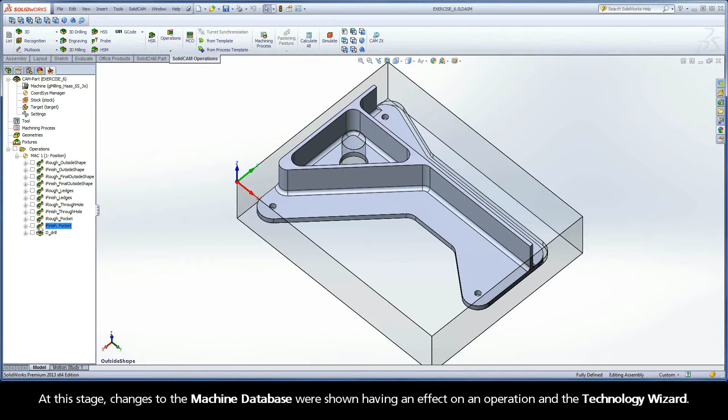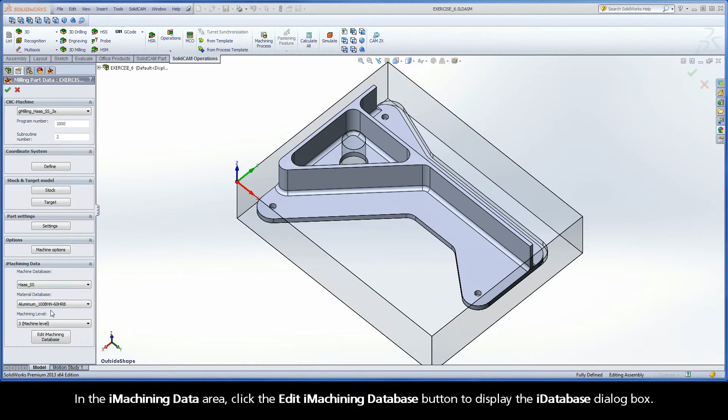Next, the focus will be on the material database and the steps necessary to either make changes to the current material definition or select a different material. To make changes to the current material definition, double-click the CAM part header to display the Milling Part Data dialog box. In the iMachining data area, click the Edit iMachining Database button to display the iDatabase dialog box.

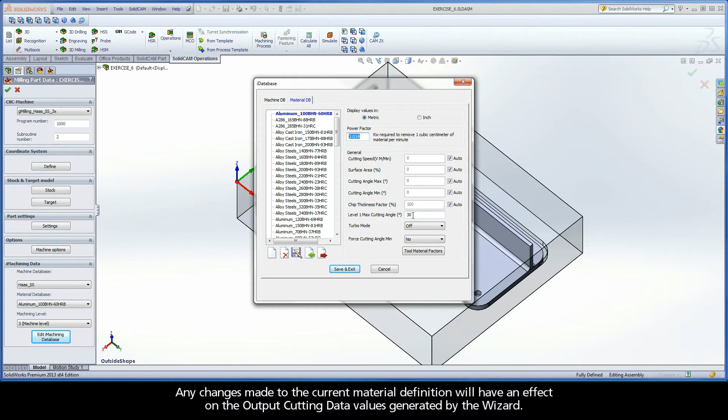The Material DB page of the iDatabase dialog box enables you to edit the parameters of existing material files saved on the system. Any changes made to the current material definition will have an effect on the output cutting data values generated by the wizard. Remember, the wizard is an algorithm for producing on-the-fly cutting conditions, and the wizard uses the work material parameters for calculating the optimal spin and feed rates, step-over ranges, etc. Click Save and Exit to close the iDatabase dialog box.

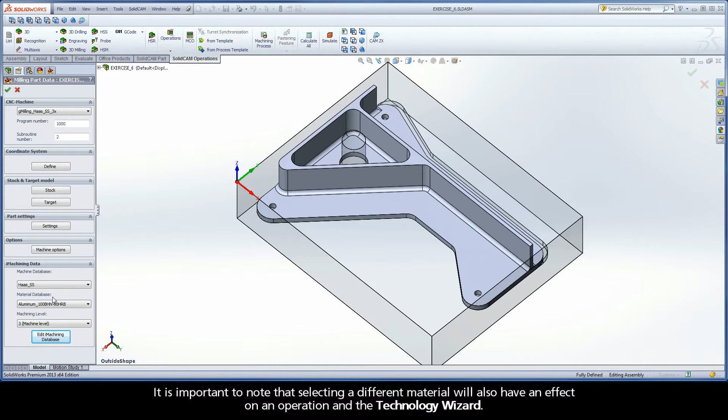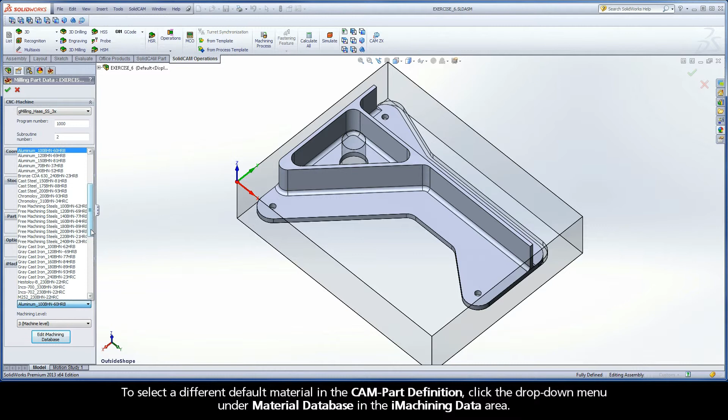It is important to note that selecting a different material will also have an effect on an operation and the technology wizard. Selecting a different material can be done three ways: in the CAM part definition, in the part tool table, and in the iMachining operation dialog box. To select a different default material in the CAM part definition, click the drop-down menu under Material Database in the iMachining data area. A list of the 70+ materials that are supplied with the system will be displayed, as well as any added material files.

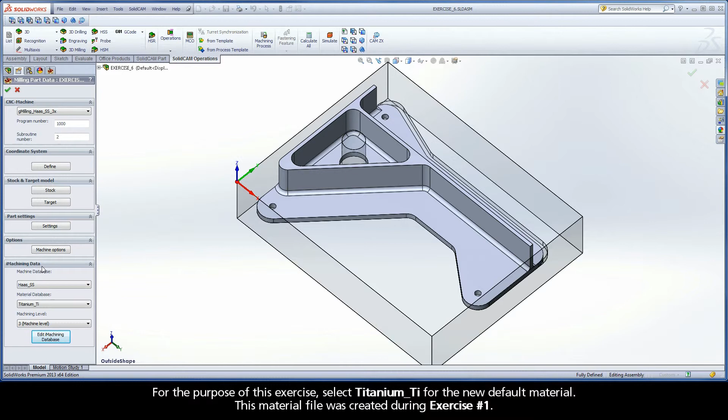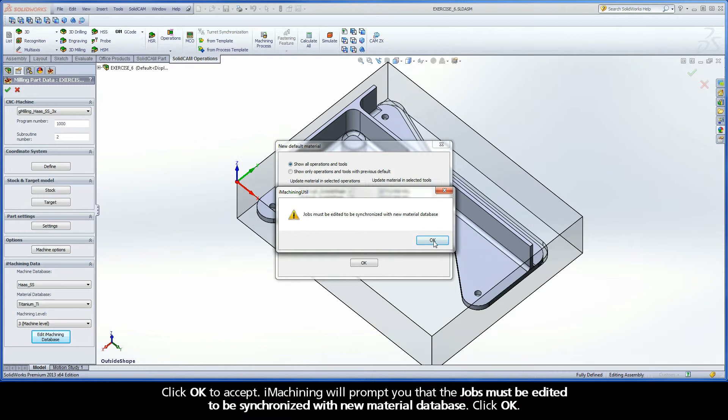For the purpose of this exercise, select Titanium TI for the new default material. This material file was created during exercise number 1. To save the changes to the CAM part data, click OK. You will be prompted to update material in selected operations and update material in selected tools using the new CAM part default. Click OK to accept. iMachining will prompt you that the jobs must be edited to be synchronized with the new material database. Click OK. The SolidCAM Manager is displayed.

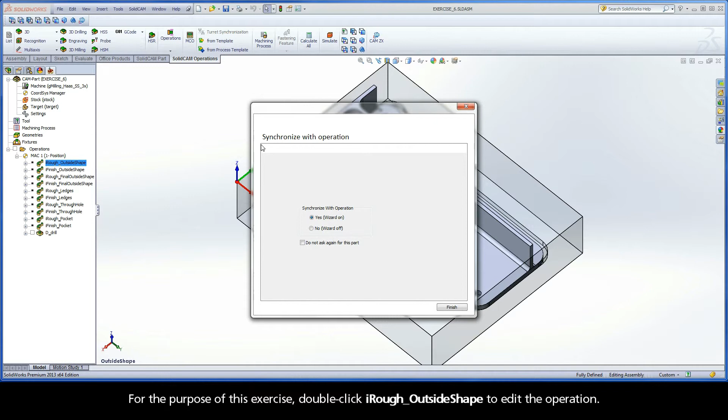Due to the material database changes, you can see that all iMachining operations in the CAM tree are no longer synchronized as indicated by the asterisks. For the purpose of this exercise, double-click iRough Outside Shape to edit the operation. The Synchronize with Operation dialog box appears and asks if you would like to turn the wizard on or off. Leave the default selection of Yes, Wizard On to write the output cutting data to the operation.

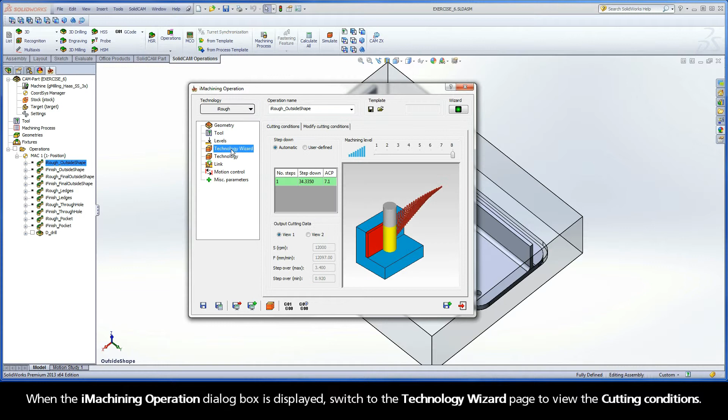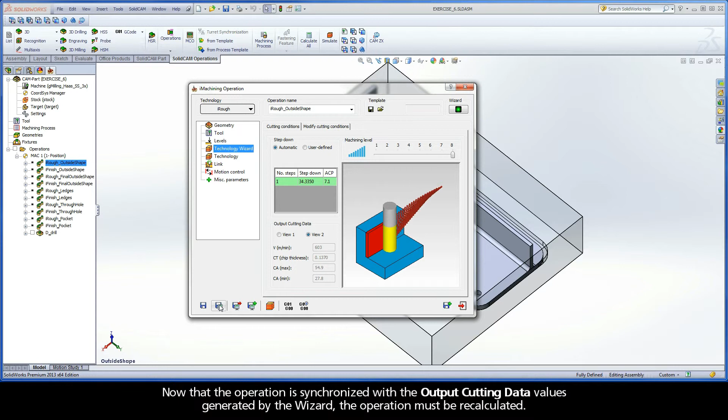Click the Finish button. When the iMachining operation dialog box is displayed, switch to the Technology Wizard page to view the cutting conditions. In the Output Cutting Data section, looking at View 1 and View 2, the following sets of data are now provided based on the selection of a different default material. Now that the operation is synchronized with the output cutting data values generated by the wizard, the operation must be recalculated. Click Save and Calculate to save the data to the operation and calculate the toolpath.

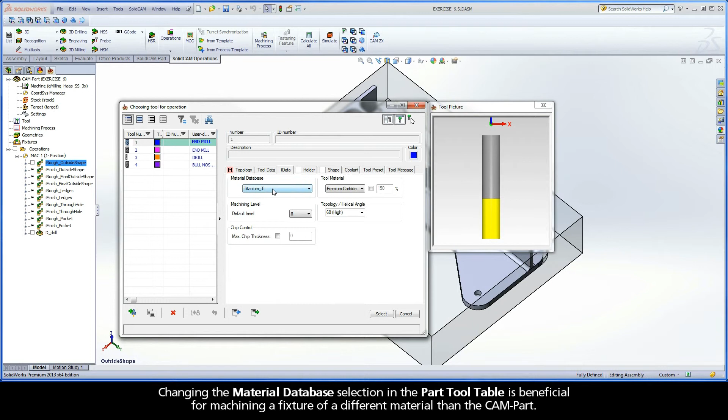To select a different material in the Part Tool table, switch to the Tool page, click the Select button, and move to the iData tab. Changing the material database selection in the Part Tool table is beneficial for machining a fixture of a different material than the CAM part. The tool can be associated with any material file saved on the system, and every time the tool is selected from the Part Tool table, the wizard will provide cutting conditions based on the associated material. Click the Cancel button to exit the Part Tool table.

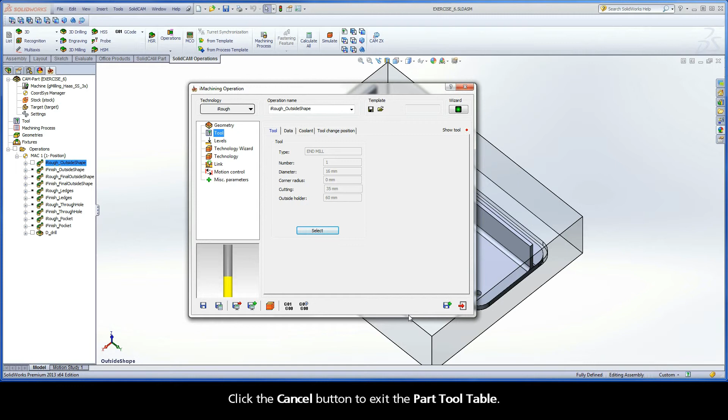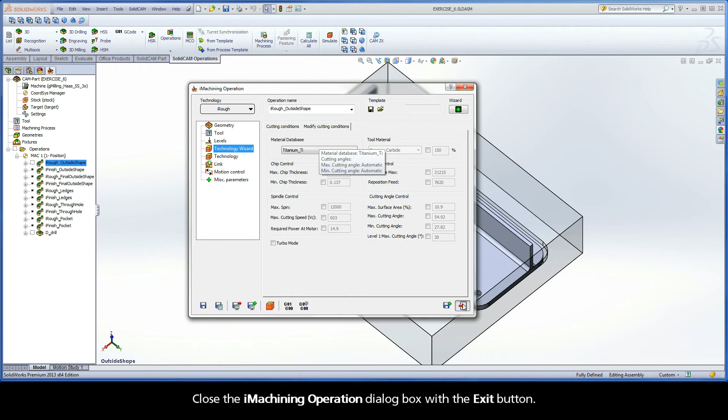To select a different material in the iMachining operation dialog box, switch to the Technology Wizard page and move to the Modify Cutting Conditions tab. Changing the material database selection in the operation is an efficient way for machining different materials on a per-operation basis. Close the iMachining operation dialog box with the Exit button. Because the iMachining data has changed again, all iMachining operations must be edited, synchronized, and recalculated for the changes to take effect.

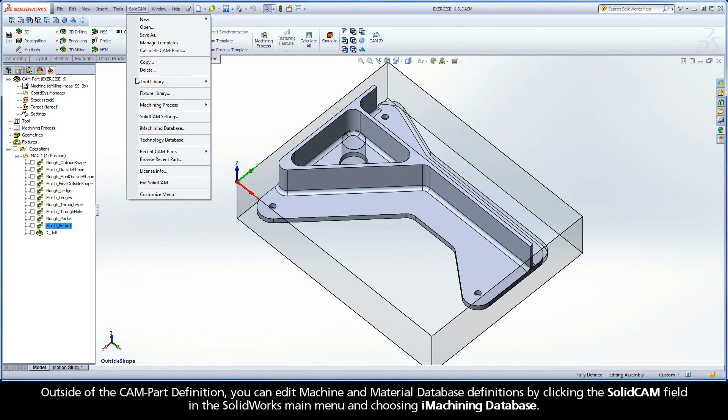Outside of the CAM part definition, you can edit machine and material database definitions by clicking the SolidCAM field in the SolidWorks main menu and choosing iMachining Database. The iDatabase dialog box is displayed, and enables you to edit the parameters of existing machine and material files saved on the system. Click Save and Exit to close the iDatabase dialog box.

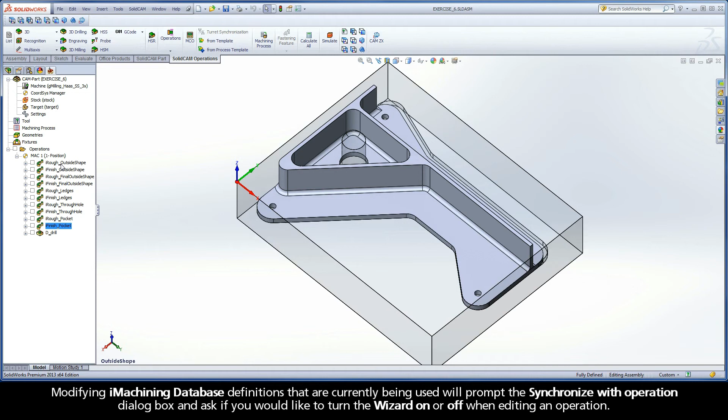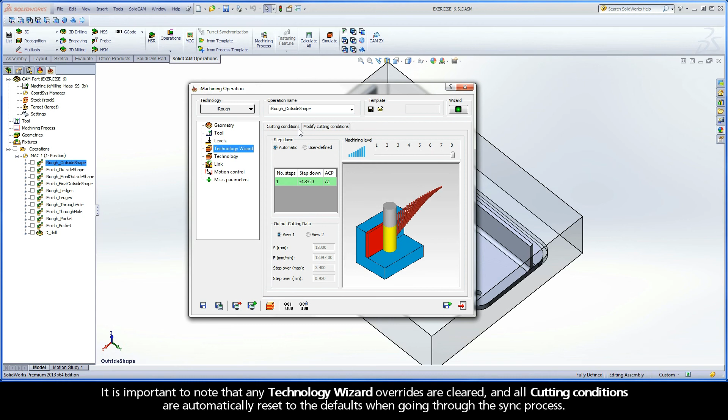Modifying iMachining database definitions that are currently being used will prompt the Synchronize with Operation dialog box and ask if you would like to turn the wizard on or off when editing an operation. It is recommended to leave the default selection of Yes, Wizard On, and synchronize the operation with the output cutting data values generated by the wizard. It is important to note that any technology wizard overrides are cleared and all cutting conditions are automatically reset to the defaults when going through the sync process.

At this stage, Step 7 is complete and the exercise has come to an end. If you have not followed along, apply and practice the procedure shown in these videos to see how making changes to the iMachining data has an effect on an operation and the technology wizard.